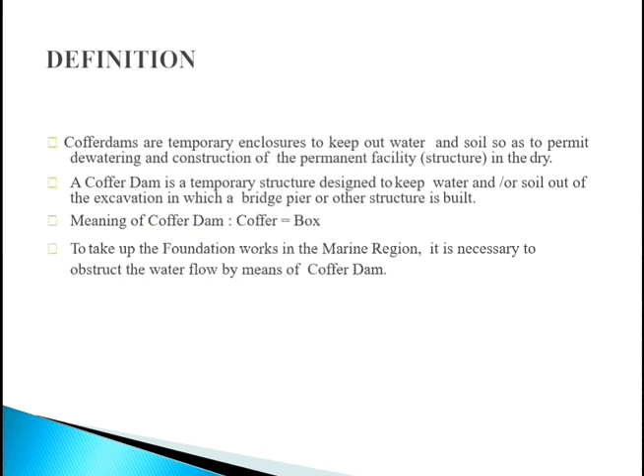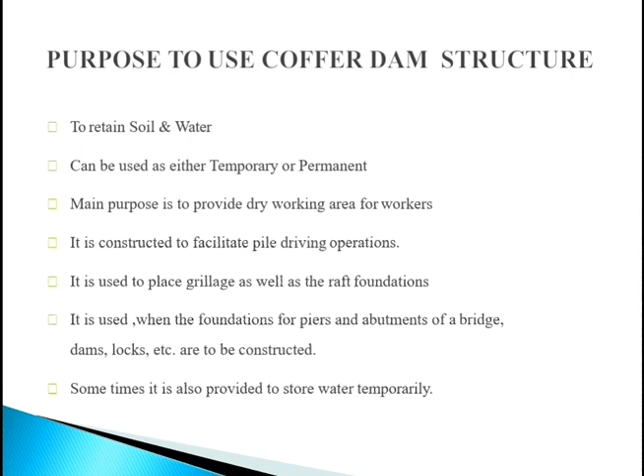Moving forward, the purpose of using a cofferdam structure. The main purpose is to retain soil and water. They can be built as temporary or permanent, and the main purpose is to provide a dry working area for workers. It is constructed to facilitate pile driving operations also. It is used to place grillage as well as raft foundations. It is also used when the foundations of piers and abutments of a bridge, dams, locks, etc. are to be constructed. Sometimes it is also provided to store water temporarily.

Cofferdams can be used in all sectors like the following. In civil engineering, we can use it for underground car parking, foundations, basement construction. In transportation engineering, bridge piers, support walls, ramps, groundwater retention, tunnel work, etc. In water engineering, weirs, culverts, flood protection walls, scour protection walls, and securing embankments, etc. And in port construction, dock works, jetty works, etc.

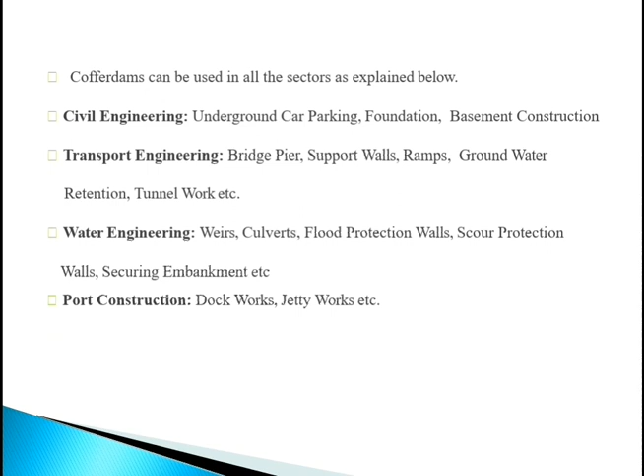Now the selection of the type of cofferdam. A cofferdam is selected according to the following criteria. If there is a low head of water, earth-filled cofferdams are used. In case of narrow excavation, single wall sheet piles are used, and in case of wide excavation, double wall cofferdams or cellular sheet piling are used. The material available at the site of construction also determines the selection of the cofferdam. The possibility of overtopping by floods, tides, etc., and sliding, rock-filled crib cofferdams are constructed.

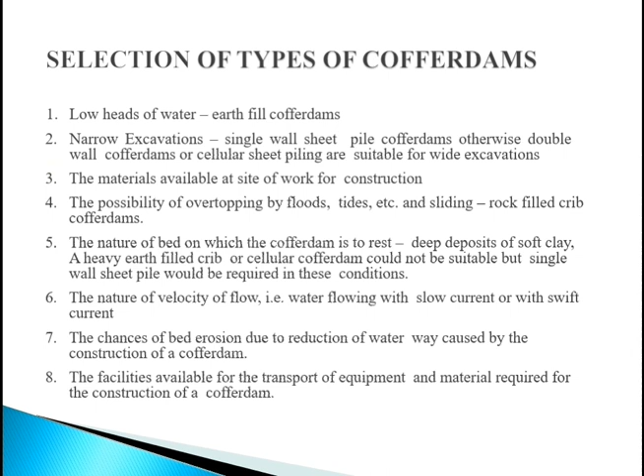The nature of the bed on which the cofferdam is to rest: on a deep deposit of soft clay, a heavy earth-filled crib or cellular cofferdam would not be suitable, but a single wall sheet pile would be required. Also, the velocity of flow, for example, water flowing with a slow current or a swift current. According to that, we have to select the cofferdam as well as its material. The chances of bed erosion due to reduction of waterway caused by the construction of the cofferdam. The facilities available for transportation of equipment and material required for the construction of a cofferdam.

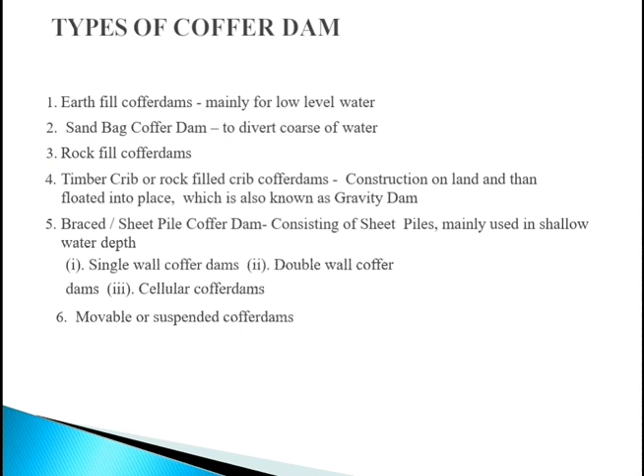Next is types of cofferdam. First is the earth-filled cofferdam, mainly constructed for low levels of water. Then the sandbag cofferdam, used to divert the course of water in the required way. Next is the rock-filled cofferdam. Then the timber crib or rock-filled crib cofferdam, constructed on land and then floated into place, also known as a gravity dam. Next is the braced and sheet pile cofferdam, consisting of sheet piles and mainly used in shallow water depth: single wall cofferdam, double wall cofferdam and cellular cofferdam. We will discuss it later. Next is movable or suspended cofferdams.

So first is the earth-filled cofferdam. You can see the construction procedure or cross-section and the required criteria shown in the figure. It is suitable for a river or stream having a shallow depth of water, about 120 to 150 centimeters, with low velocity of flow. It is the simplest type of cofferdam. Freeboard is 60 to 90 centimeters. Top width of the earth dike is 1 meter. Suitable side slopes should be provided, and suitable drains also. It depends on soil availability and site condition. If dry conditions are there, a clay embankment is provided, and if wet conditions are there, sand materials are suitable.

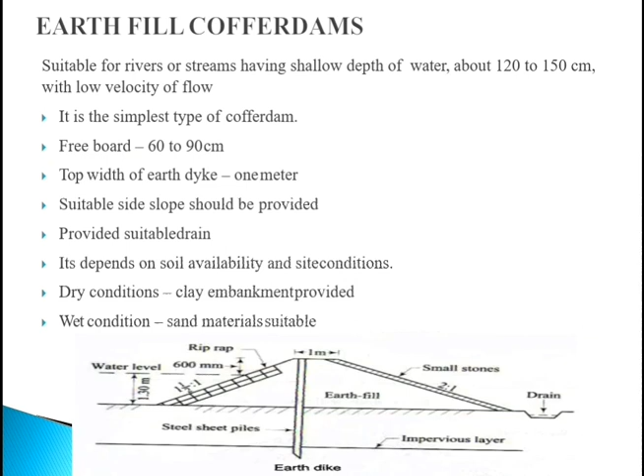Next is the rock-filled cofferdam. You can see two types of rock-filled cofferdam in the image. The construction of a rock-filled cofferdam is similar to earth-filled dams, but it can be constructed with steeper slopes and water depth up to 3 meters. In case of high head of water, this can be achieved by a clay or concrete core wall. Also, an impervious layer of concrete or clay core wall or sheet pile is provided for reducing the entry of seepage.

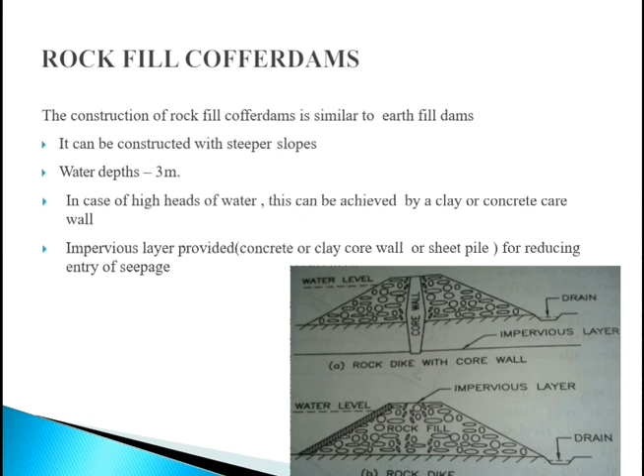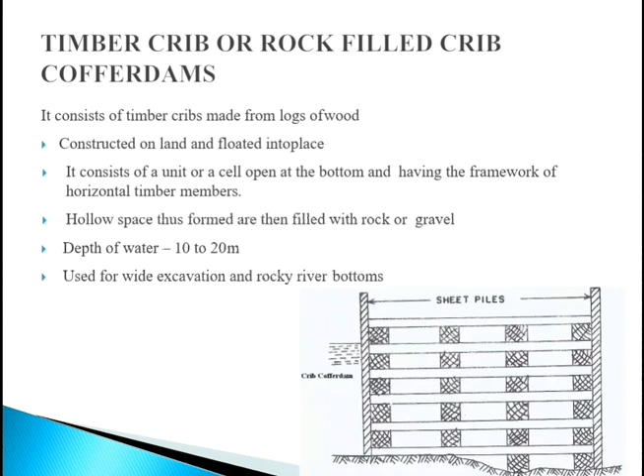Next, timber crib or rock-filled crib cofferdams. You can see it in the image. It is first constructed on land and then floated into the position where it is required. It consists of unit cells open at the bottom with a framework of horizontal timber members. The hollow forms are then filled with rock or gravel. You can see that in the image. Depth of water is 10 to 20 meters, and it is used for wide excavation and rocky river bottoms.

Next one is sheet pile coffer dam. The first type is single wall coffer dam. It is used where the area to be enclosed is very small and the depth of water is more, for example 4.5 to 6 meters. A single row of sheet pile is provided on the whole length of the coffer dam.

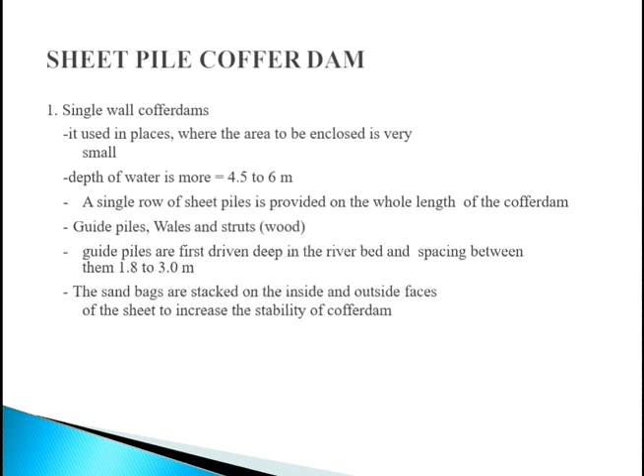Guide piles, wales, and struts of wood are used. Guide piles are first driven deep into the riverbed and the spacing between them is kept to 1.8 to 3.0 meters. Sandbags are stacked on the inside and outside faces of the sheet to increase the stability of the coffer dam. You can see all the process in this image, plan and cross sectional area, and all the components.

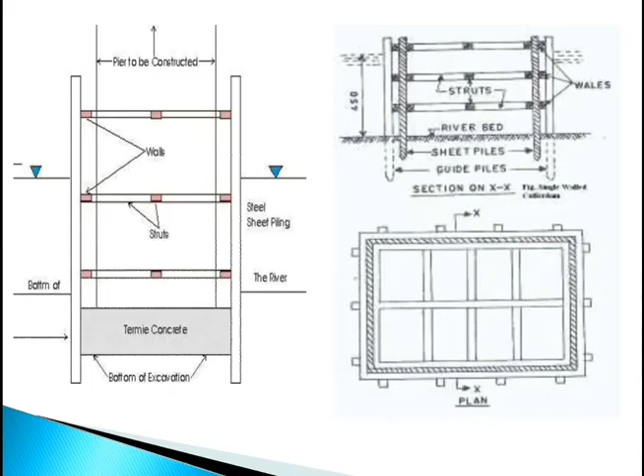Now moving on to the double wall coffer dam. When the area to be enclosed is very large, it is necessary to provide a double wall coffer dam. There are two types: the first is the Ohio River type coffer dam, known as such because it was constructed on the Ohio River first, and the second is the timber or steel sheeting coffer dam.

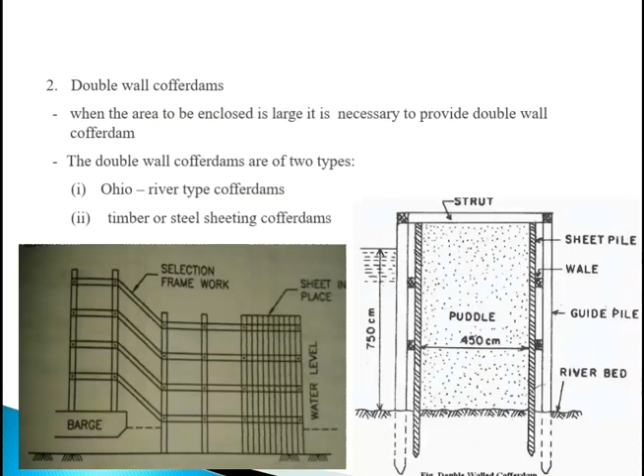Next one is cellular coffer dam. You can see both types, circular type and diaphragm type, in the image, plan and section. Cellular coffer dams are mostly used for dewatering large areas where the depth of water may be 19 to 21 meters, mostly used in the construction of marine structures like dams, locks, etc.

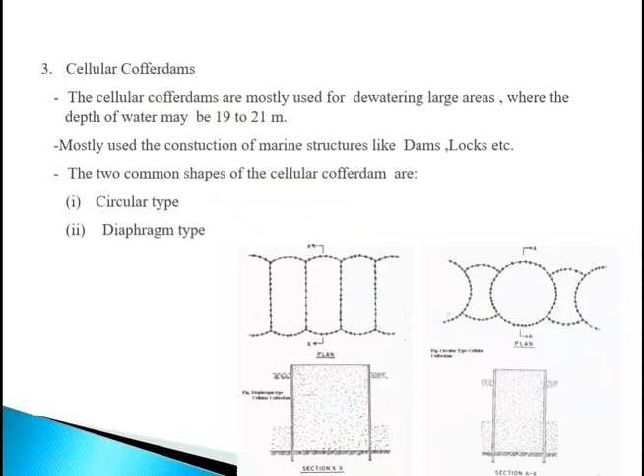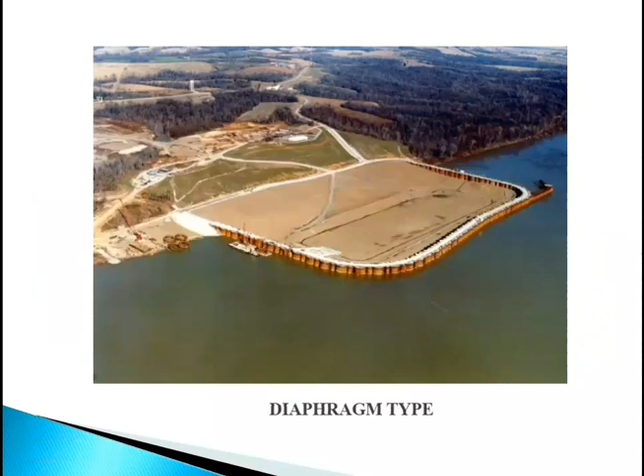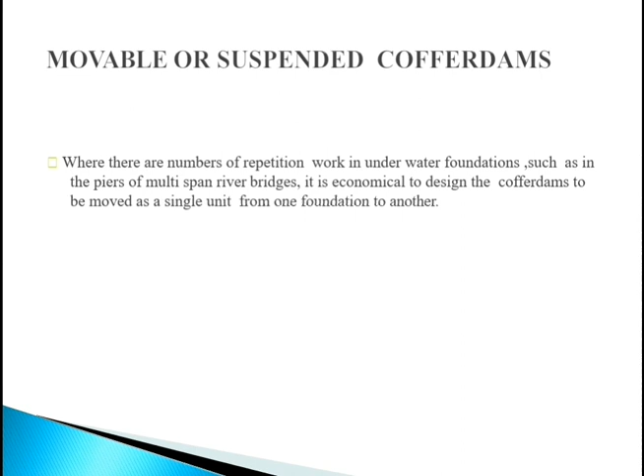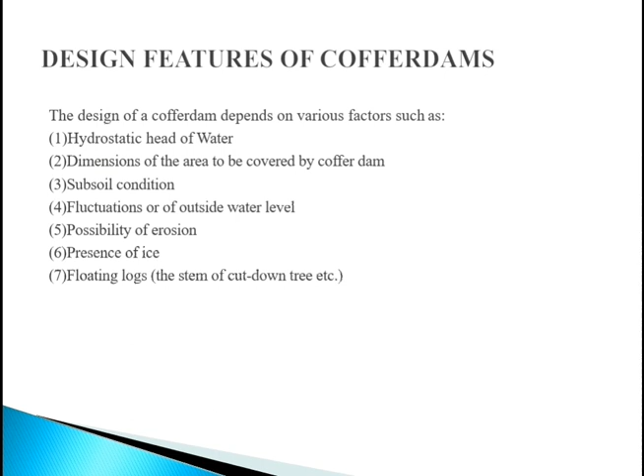Next one is movable or suspended coffer dams, used where there are a number of repetition works in underwater foundations such as piers of multi-span river bridges. It is economical to design a coffer dam to be moved as a single unit from one foundation to another. The features of a coffer dam depend on various factors such as hydrostatic head of water, dimension of the area to be covered, subsoil condition, fluctuation of outside water level, possibility of erosion, presence of ice, floating logs, and the stem of cut down trees, etc.

A purely theoretically designed coffer dam may fail for factors not accounted for in its design. Therefore, it becomes necessary to combine practical knowledge and experience with the theoretical aspect in the design of a coffer dam.

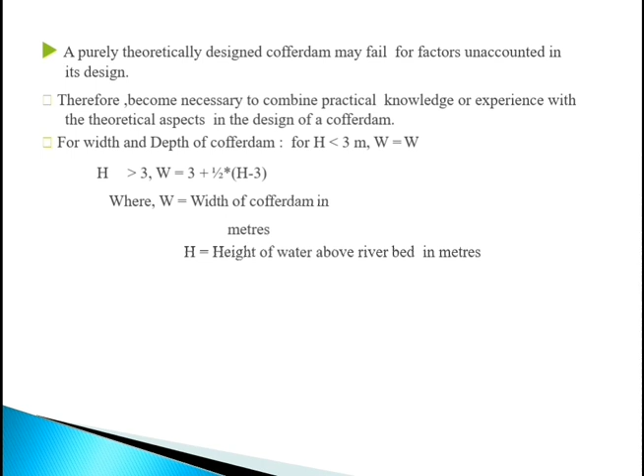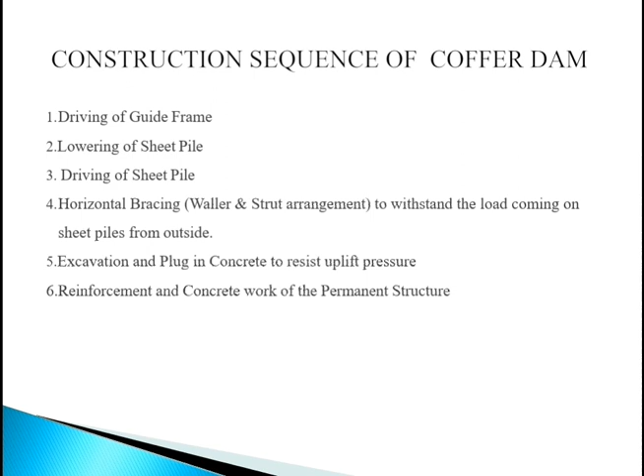Next, the factor governing the economical height of the coffer dam. This is also the most important theory for the coffer dam. The first factor is depth of water. For low depth, earth dams are used. For high depth, sheet pile coffer dams are used.

Next, according to current and nature of flow. Where high current exists, sheet pile coffer dam is used, giving higher seepage control capacity, and in low current, earth or other dams are used with less seepage control capacity.

Next, type and period of work. For shorter duration of work, timber dam is used. For longer duration of work, sheet pile coffer dams are used.

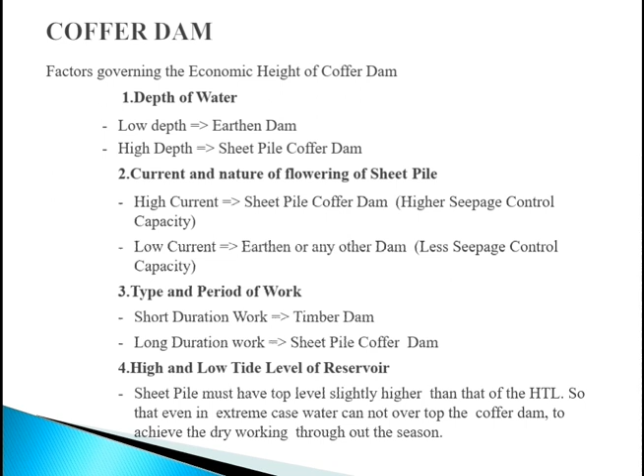Next one is the high and low tide level of the reservoir. The sheet pile must have its top level slightly higher than that of the HTL, so that even in the extreme case, water cannot overtop the coffer dam, to achieve dry working throughout the season.